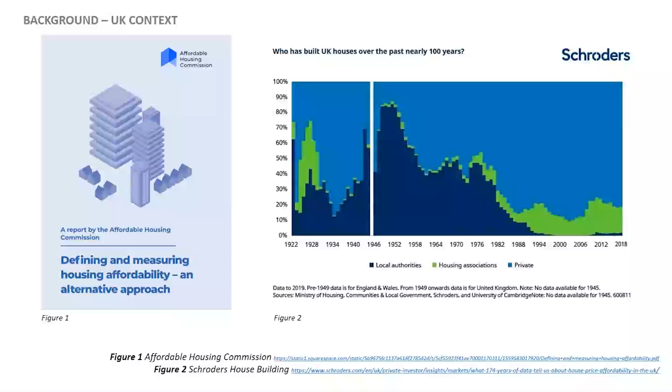So what we're seeing, as well as problems in relation to affordability, is a reduction in government proposed and funded housing schemes that reduced the profitability of housing. It's not just the method of procurement of housing, it's also issues in relation to affordability. Quite stunning graphs here.

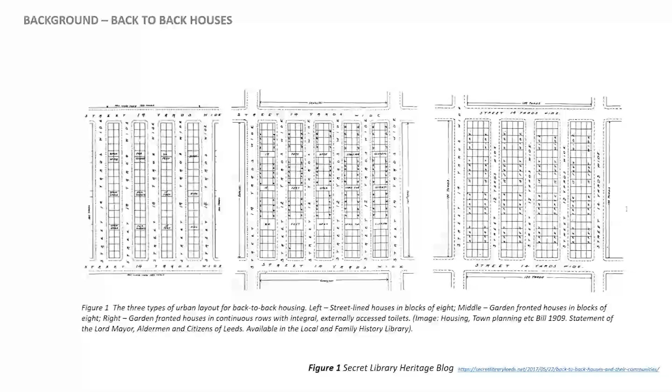And the concept, and why they're called back to back, is that literally it's one house which is on the back of the other. So there's no garden at the back of the house. It shares a kind of core wall. And often they would share an adjacency as well to buildings.

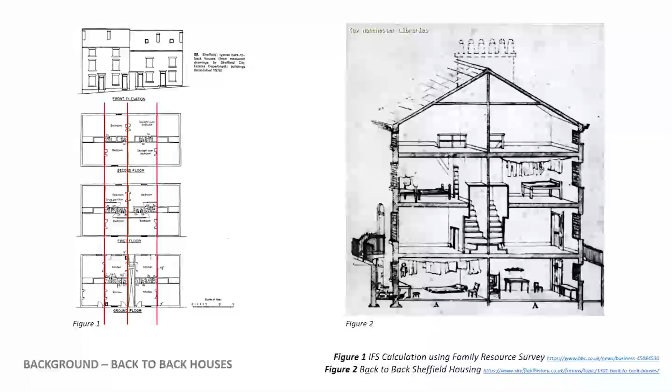So in the plan here that you see on the left, these are the literal divisions of the walls in the houses, and these are the planned divisions. So actually what you get is 8 houses in that block.

Now obviously in terms of space standards, that was very low, but what I was quite interested in is not necessarily the smallness of space, but rather the process and the density which could be achieved in a more positive way, taking into account the benefits of sustainable approaches and shared living and community living.

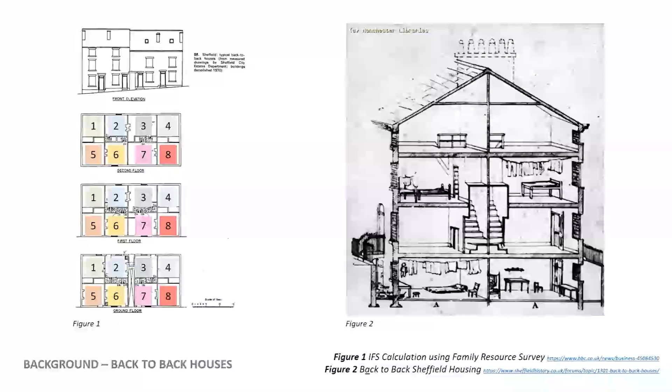So in terms of the research proposal, what we proposed was that we effectively build half a house, so half of that back to back. So a developer would build a half house, and what that would do is give young families or people who are struggling financially a single house to live in within a specific area, but towards the back of it, it would retain that space for the owner.

So it would mean that in future years, in the lifetime of the owner, if they were to have children, or if they were to change their jobs, or if they were to get a car, that space could then be built upon to extend out relative to the life changes of the owner.

So as I said before, maybe the owner saves money over time, and then they can save up to build out and build up as well. Fundamentally, that was the approach with the research proposal: if we were to build one house and a space where you can have lots of different configurations of an extension, how would you go about that? What would you do?

I think a really important part of it was this concept of lifetime homes. So the fact that a home can really be a place to live in for life if it retains sufficient flexibility. What that does is it reduces the requirement to build new.

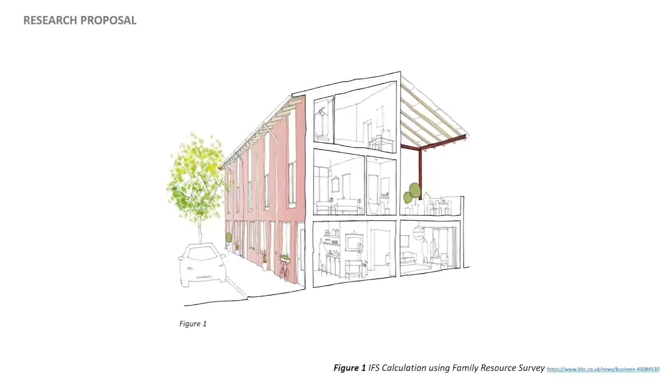So what we're trying to do as architects, if you see the RIBA Way Ahead report, and obviously the latest statements by Biden and Johnson, we're really looking to cut down on new builds. So this really is a kind of solution for adaptation, renovation for existing families.

So conceptually, what we looked at then is how to, a little bit similar to the paper that I produced earlier, change configurations and play around with configurations. And I guess in terms of this process, the objective was for the research to provide the homeowner or the person purchasing the house with much clearer future financial planning capacity.

So the idea of the research was that the owner would be able to project 10, 15, 20 years to say, well, what would it cost me if I had one child in 3 years' time? What would it cost me if I had a car in 5 years' time? What would it cost to have a garden in 20 years' time? How would it change the cost and the renovation of the house.

So working on the base build, which is on the left, which is the initial building that the homeowner moves into. The concept is that the future phase, shown in green on the right, can be built in subsequent years if life changes happen.

On the drawing on the left it says 1 and 2. 1 is the base build. The ground floor is a basic kitchen and stairs going up, and at the back there's a garden area. First floor has a living room, bathroom, and some storage, but there's no room next to it, so it just looks down on the garden below. The second floor is the same - a single bedroom with no space, so you just look down into the garden below.

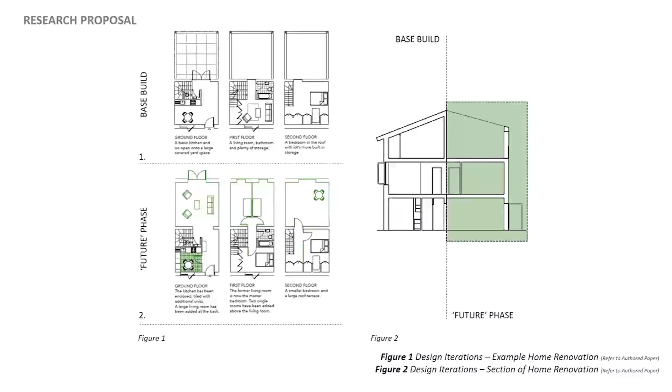So this basically demonstrates that there are lots of different ways to configure this building, subject to the individual's lifetime approach. So how did we go about doing that?

We looked at idealized layouts for very small or dense homes. We looked at back-to-back approaches in terms of how circulation worked, which is actually quite clever when you look at it. Then we came up with as many configurations as we thought worked, given this really close and dense space - the base build, and the builds in the extension to the other side, or the future extension.

So we came up with 71 possible iterations for the ground floor, 84 possible iterations for the first floor, and 71 possible iterations for the second floor, which I think, I hope, comes around to 423,444 options.

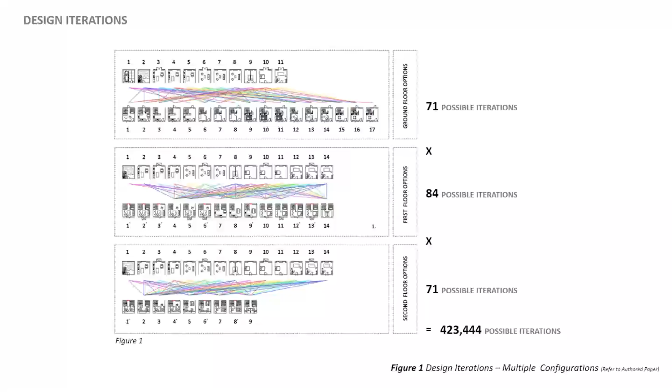Now not all these options are valid. For example, you wouldn't necessarily want a house with just 6 bedrooms in them - that'd be totally rubbish. So within the 423,000 there's obviously some dud options coming out. Not all of them are great options, but it shows you the kind of range and width of choices that could be available in this approach.

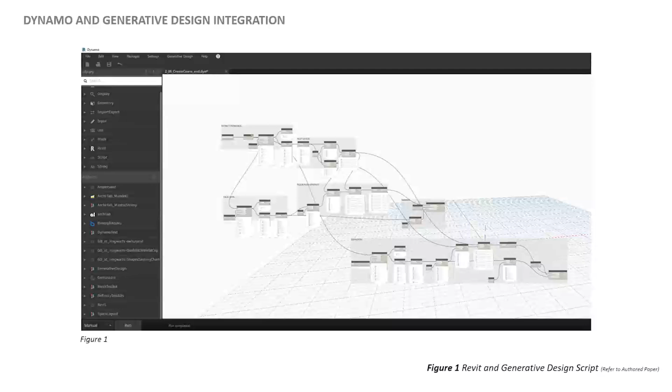Similar to the last project, this time I used a different software though - I used Dynamo, which is a Revit program. In terms of the framework, we drew all of these plans and put them into the Dynamo model, which would then generate a series of generative outcomes based on the timeline of what the homeowner thought they could do or might do.

This would then generate a visual output so the owner could see what those 2 bedrooms might look like, how the garage might work, where the kitchen might be. The client then chooses the preferred option. Those quantities of material generated from the changes or alterations to the house are taken into Excel directly, and that outputs a total cost.

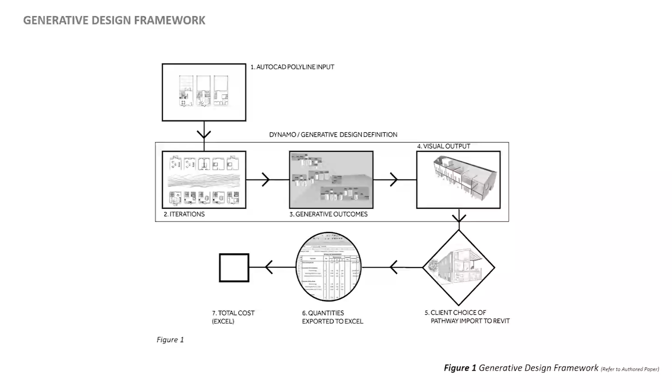So what it is effectively is a means of quantifying what would happen to your house, or what alterations to your house would cost you basically. So it's a way of future planning and future cost planning for houses.

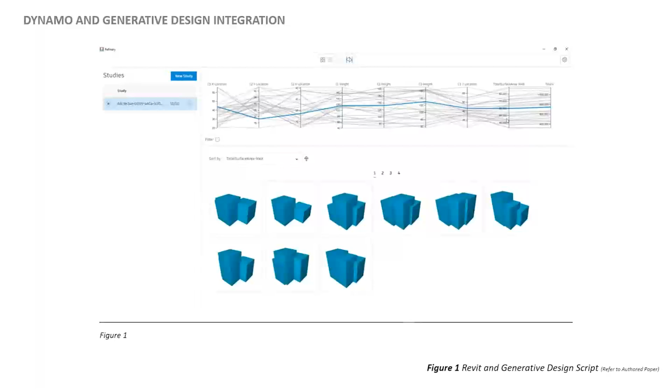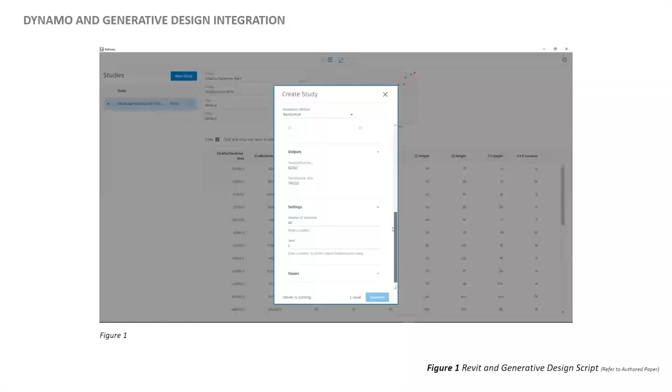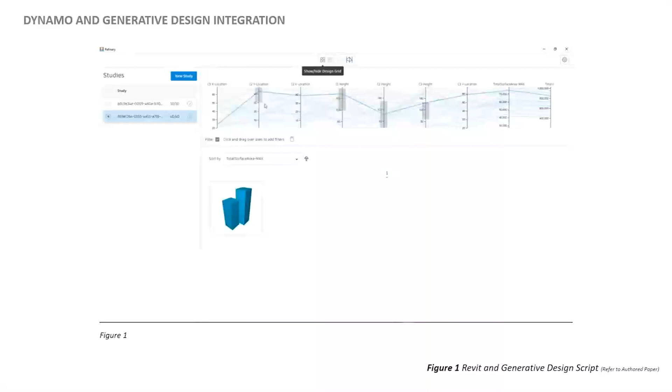And in terms of the software, it kind of looks a little bit like this - as a screen, these are all options. That's the parallel coordinates point comparison at the top. All it does is compare iterations of outcomes, and with 470-odd thousand, it's all down to what the house owner thinks they will do. It can compare things like total area, storage, and kitchen size as well - there are various really detailed configurations you can go into.

And of course, fundamental to that is ensuring that this isn't just a visual methodology, that it's based on cost as well, because it's a tool for future planning. So we linked it into the SPONS Architects and Builders price book as well.

The great thing about, and the reason why I use Revit, is because it's a great building information modeling system as well. It can extract quantities very easily and place them into an Excel file very easily.

So it can automatically and very quickly give you a price for, say, a lifetime change almost instantly. It's almost not meant to be a one-off exercise. You wouldn't expect a homeowner to do this once and then go away.

It's almost like a tool that the homeowner has for the duration of the house, a little bit like a digital twin, whereby they can use it as a little app to say, okay, we've just found out that we're having another baby, what's that going to cost us in terms of the house. So it's like an ongoing thing.

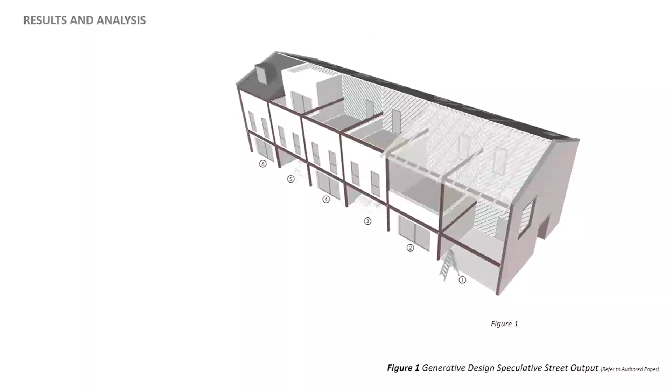In terms of the results, what we did is we got people—we asked six individuals to speculate on what their future lifetime might be. So we then generated those six outcomes in terms of the houses.

For example, this graphic is the kind of six houses in a block. Participant number 6, at number 6, a multi-generational family have added a living room and 2 bedrooms. You can see on the graphic, on the top floor, they've added a kitchenette and living room to the bedroom to give their grandparents some privacy. So that's a £70,000 base build, and then there's an additional £23,000 lifetime alterations.

Obviously there needs to be consideration in terms of inflation as well, which we did take into account, but this is estimation. It's very difficult to get precise future costs, but obviously we can speculate and try, and it helps future planning as well.

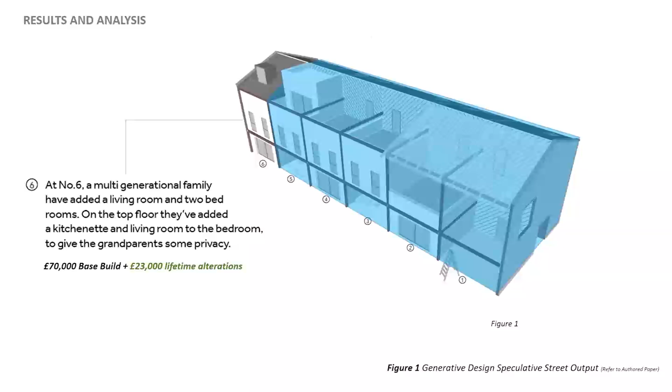So number 5, they extended and adapted their roof space into a living room to take advantage of the terrace on the 2nd floor, and the 1st floor is all bedrooms. £65,000 base build, £15,000 lifetime alterations.

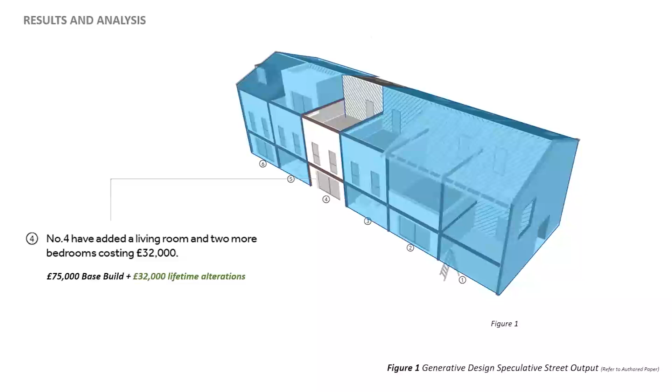Number 4 have added a living room and 2 more bedrooms costing £32,000, so £75,000 base build, £32,000 lifetime. Number 3, they've added 2 children's bedrooms at 1st floor, and they park their car underneath, so £68,000 base build, £15,000 lifetime.

The owner of number 2 has built a home office, nice, on the ground floor, and a roof terrace on the 1st. £62,000 base build, £10,000 lifetime.

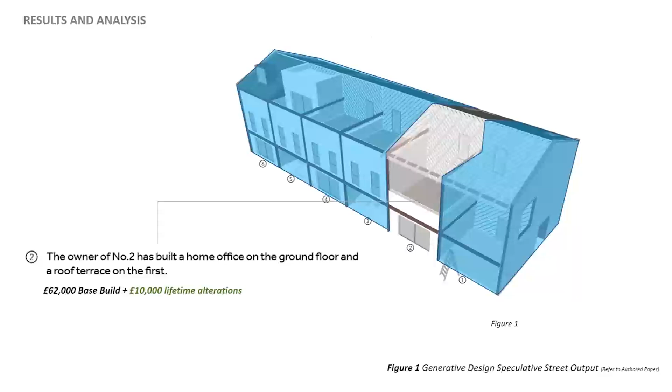And the couple at number 1, they're like a first-time buyer, effectively. So they bought half a house, and it was constructed by a small-scale developer. They've only paid for the cost of the base build, £60,000, and obviously they have 0 lifetime alterations because it hasn't been altered yet.

In terms of what we've done, I guess the methodology proves that, in essence, the approach can work. I think there's still a lot of work to do in terms of getting the detail out, of how comparable the financial outputs are to real world outputs. That's been a slightly difficult thing, but it's been great to be able to come up with a vision as to how a methodology might work.

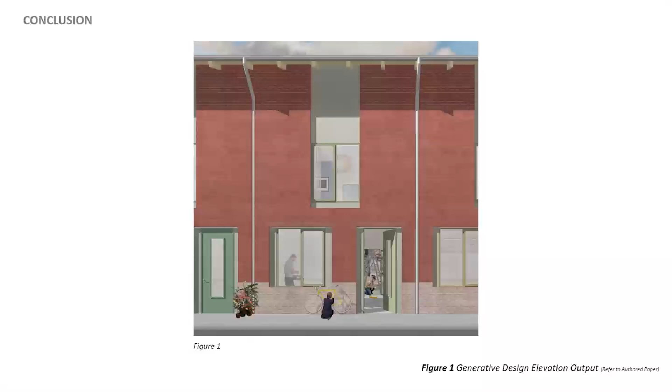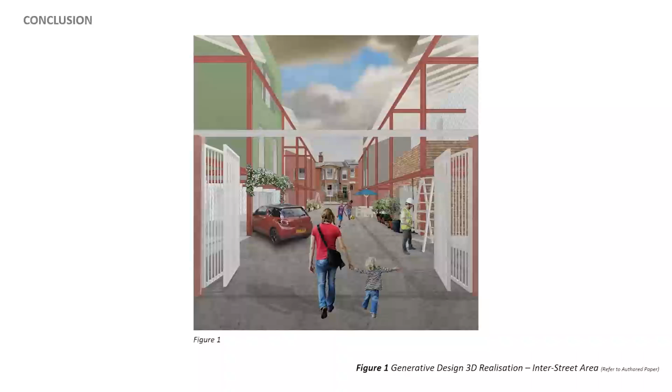And I think as well, it could work as quite an interesting social experiment. So that's an actual visualization of the space in the middle of these kind of back-to-back half a house things, which we envisage as a truly community space as well.

In terms of future work, the project has gained some interest. We are looking to use or test the methodology on something called Bailrigg Garden Village, just south of our university in Lancaster—that's 3,500 homes. I'm not saying this methodology will build 3,500 homes, but it might just work towards testing it out and getting some data on it.

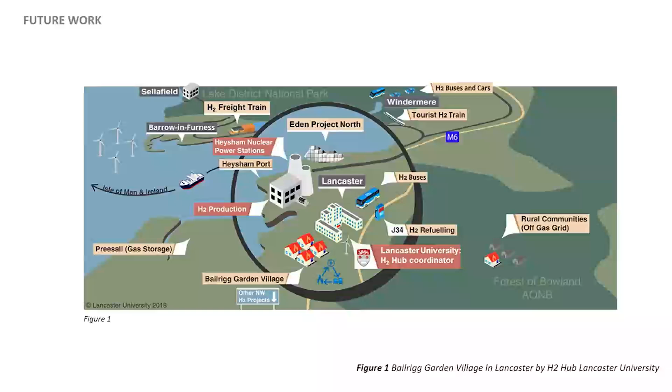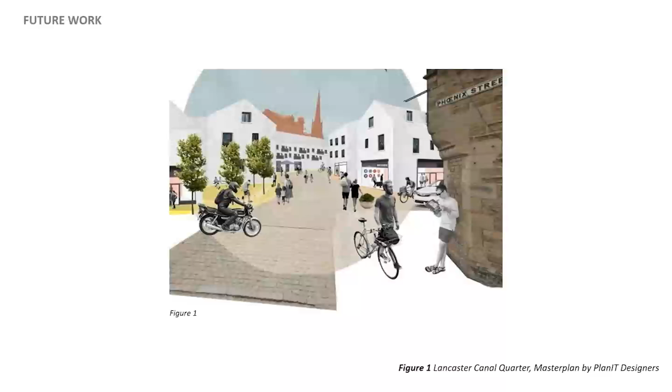And as well, we've been approached speculatively by Lancaster City Council because they're doing some housing in the city centre canal quarter as well. So there are lots of things, I think, that will hopefully come from it, but that's me. Thank you very much.